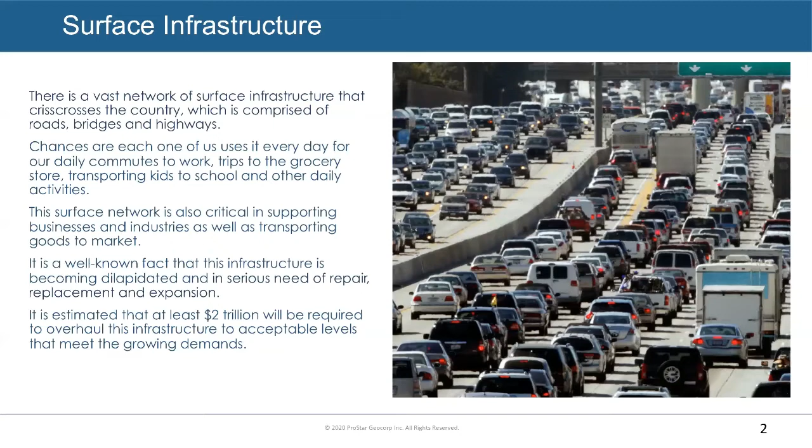It's a well-known fact that this infrastructure is becoming dilapidated. We hear it on the news, on TV, and of course we experience it - it's a nuisance when we hit a pothole or there are delays on the road because of repairs being done. It's estimated that it could cost as much as $2 trillion to get that infrastructure up to acceptable levels to meet the current growing demands.

To put things into perspective, there's 2.6 million miles of paved roads and highways that we rely on for daily commerce and commuting. Over 50 years ago is when most of this infrastructure was actually built. You heard Rob talk about ASCE, the American Society of Civil Engineers. ASCE recently gave a D+ rating to our infrastructure, which is obviously a pretty poor rating for those of us who got grades like that in school.

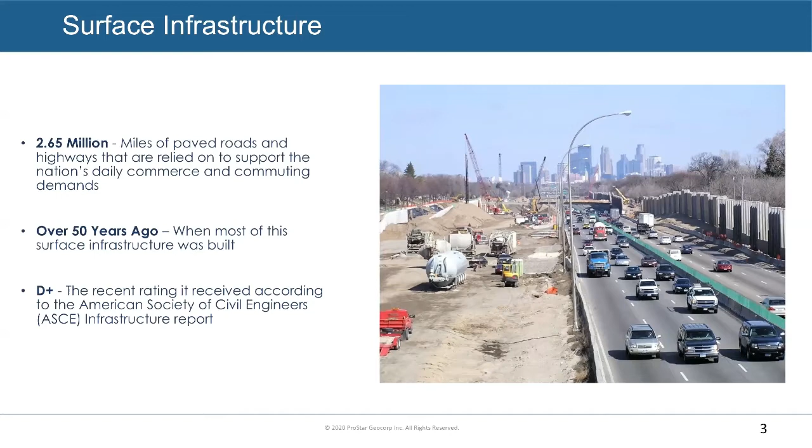Out of sight, out of mind. Again, a lot of times when we think about smart cities, we're focusing on what's above ground, but very seldom do we talk about what's below ground. Below the ground we have oil pipelines, gas pipelines, water lines, sewer, storm sewers, telephone, fiber optic, electric, cable. So there are a lot of utilities buried below the ground that maybe in some cases we're just not aware of because we don't get to see it every day.

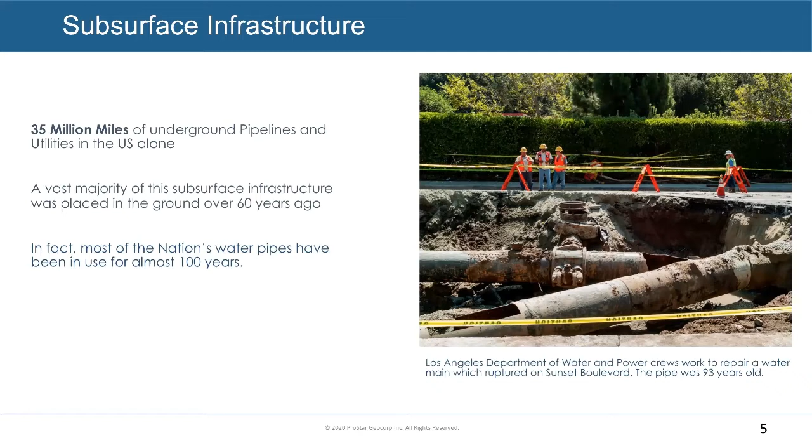As far as subsurface infrastructure, there's 35 million miles of underground pipelines and utilities in the United States alone. Most of that is buried below that 2.6 million miles of paved roads. One of the challenges is that the vast majority of that infrastructure was put into the ground over 60 years ago. In fact, most of the nation's water pipes have been in use for almost 100 years. Over on the right, I show you a picture of a water main that ruptured just off Sunset Boulevard in Los Angeles, and the pipe was 93 years old.

How many miles of oil and gas pipelines are there? In a lot of cases that's where most of the focus is, because if these lines have a problem or rupture, you're spilling gases into the ground. It affects our environment, and in some cases can cause explosions - it's very dangerous. But just take a look at some of these numbers: as far as gas distribution, there's over 2 million miles of lines buried in the United States. Gas transmission, 318,000 miles. Hazardous liquid, 200,000 miles.

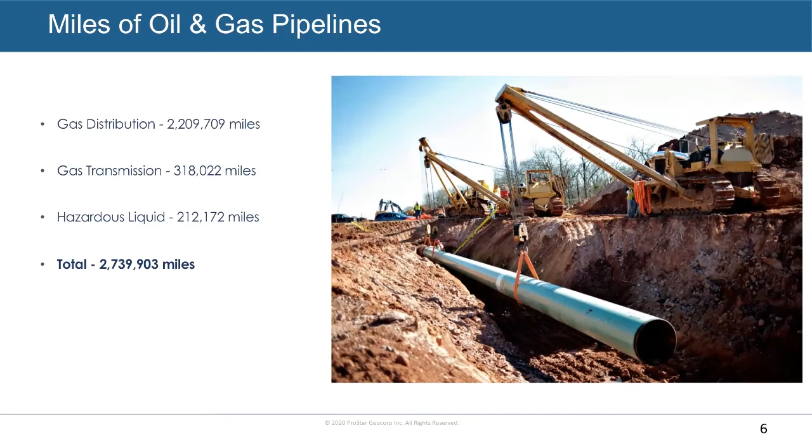So the total is a little over 2.7 million miles of pipelines that are buried below the ground. Now I just want to go over some annual additions just to show how fast this is growing and expanding.

There's 850,000 new houses being added each year. As a result, there's 50,000 miles of new gas pipelines being built, 250,000 miles of new telecom cables going into the ground, and 280,000 miles of new water lines.

What might surprise you, and I'll get into this a little later, is that as these lines are being put into the ground, in most cases they're not being mapped. So we really don't know where they're going into the ground, at least not with any level of precision.

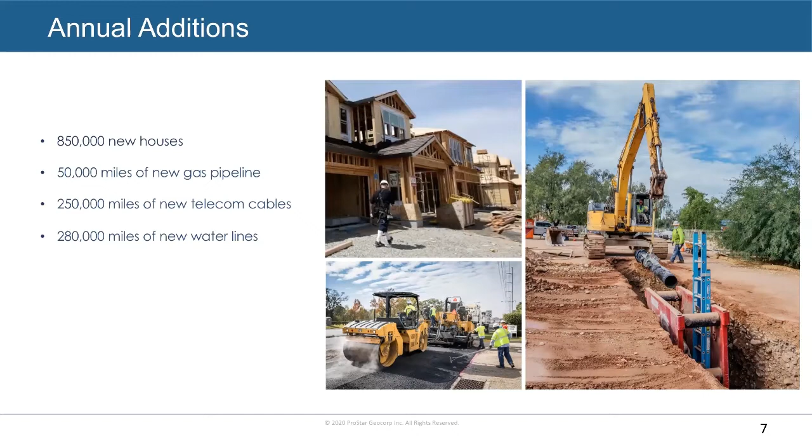So let's take a look at the problem this is causing. Obviously, anytime you add, repair, or replace the surface or subsurface infrastructure, you have a chance of damaging a utility line or a pipeline, and it happens far too often.

In fact, just in the United States, there's over 500,000 strikes per year, and that number is growing. That's about a strike every single minute of every working day.

And when a strike occurs, what happens? Lights can go out, traffic is disrupted. We've probably experienced maybe some flooding in and around our neighborhoods. But in worst case scenarios, gases get emitted into the air, and far too often they can be the cause of serious injury and sometimes even death.

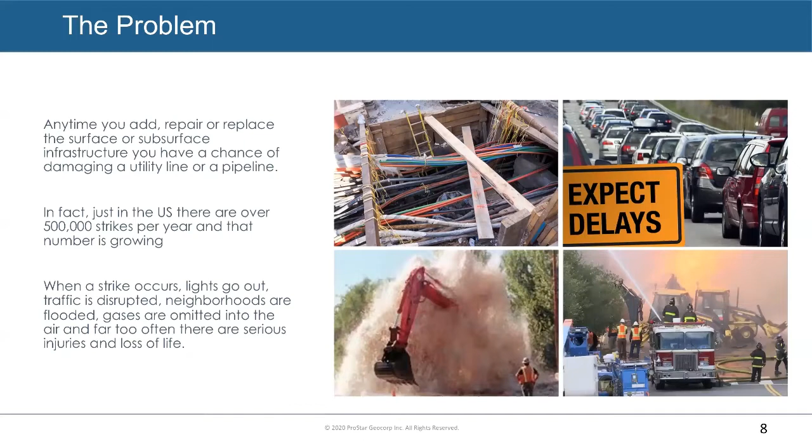Because I live in Colorado, I can give you an example, and we can focus on the Firestone incident. If you live in Colorado, you're very familiar with it. It was on April 17th of 2017 when a home exploded in Firestone, killing 2 men and leaving a woman and a child in the hospital.

Why did the explosion occur? It was due to ignition of a natural gas line that had been severed, so it had been cut. The problem was not knowing the location or the condition of that line.

But in that same year, we may not be aware of this, we had 9 more similar incidents. So it happens far too often, and it's often a result of not knowing where that utility line is buried in the ground or the condition of it.

So what's the current damage prevention procedures and processes that are in place? The speaker before, Rob Martindale, touched a little bit on 811. That process is implemented throughout the United States. Each state has an 811 center, called a one call center.

Utility and pipeline companies provide the location of their assets to the best of their knowledge to the 811 center. And 100% of construction projects, by law, have to go out and identify where the utility lines are prior to any type of digging activity occurring.

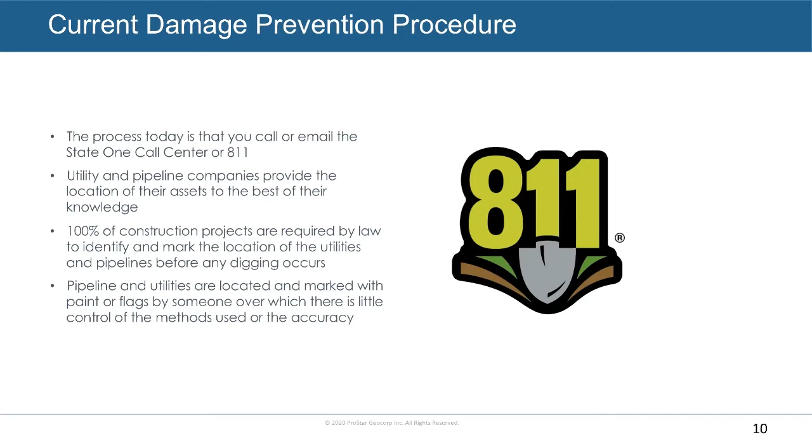These pipelines and utilities are located and marked by locate companies, and when they locate where that utility line is, they put down a paint mark or a flag. But the problem is that there's very little control methods in place or any levels of accuracy as far as how those utilities are located.

So let's take a look at one city, and I'll pick on New York City here and give you some statistics. Underneath about 6,000 miles of paved roads lies all their utilities and pipelines. Each year, to facilitate construction and repairs, they slice open those roads about 500 times per day. And anytime anybody slices open a road, there's a high probability that you're going to hit a utility line.

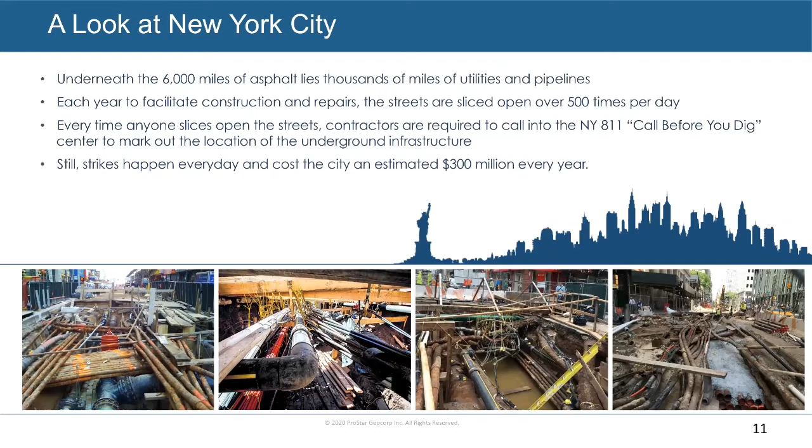So they're required to call the call center, 811, to have the locators come out and mark the location of where the underground utilities are located. However, still a strike happens every day and costs the city, they estimate, upward of $300 million every year.

So why does this occur? What's the problem? Well, the majority of the problem lies around the fact that utility and pipeline companies have very poor data of where their utilities are located.

Often these records are old, they're outdated, they've been lost, or maybe they never existed at all. Any records that do exist are often inconsistent in terms of their quality and their content, and because they're in different data formats, they're very difficult to share with others.

So let's take a look at what these records consist of. What I'm showing you here, similar to what Rob Martindale was showing CDOT, is an as-built drawing.

As-built are design drawings showing where the utility is planned to go. But more times than not, once they go out and install the utility, it's not exactly where they planned it to go. A lot of times that might be because they take a path of least resistance. It's not buried below the ground to the depths required because no one's really monitoring it. Or in some cases, maybe there's obstacles like buildings they didn't know were there, or the road's been expanded, the sidewalk's been moved, or the soil conditions are just too hard.

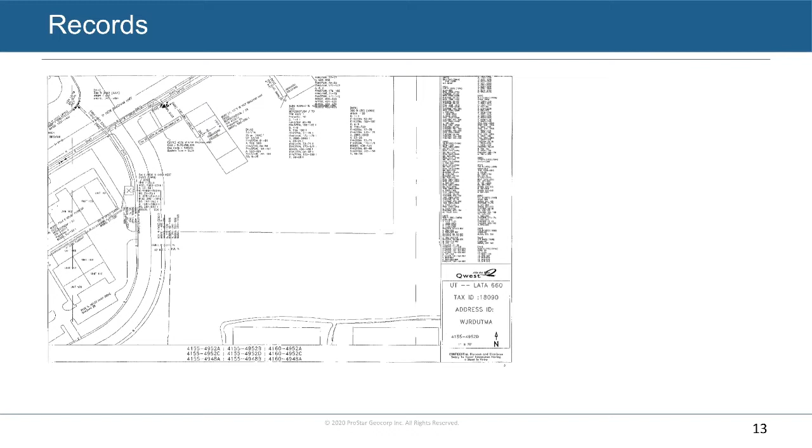Other times what they do is they'll provide sketches. So this is an actual sketch of a line coming out of a house, even though that's not exactly what it looks like. But these are the type of records that go into the system that the next person, either a contractor or an excavator, has to rely on before they make a dig decision.

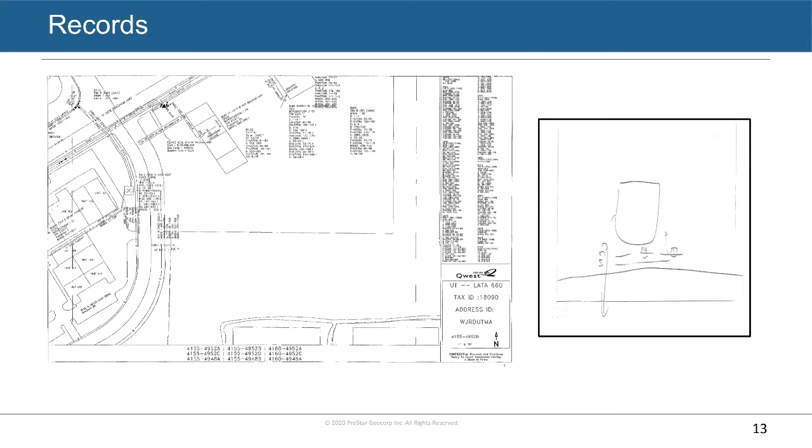How is the current utilities located? So when you call into the one call center, it determines which utilities could be impacted by the construction, then they send locators out to locate where the utility lines are. What you see on the left here is a radio detection electromagnetic locate tool. Once they locate where the utility is below the ground, they'll either mark it with paint, or in some cases they'll put flags down, especially if it's in a field or grass area.

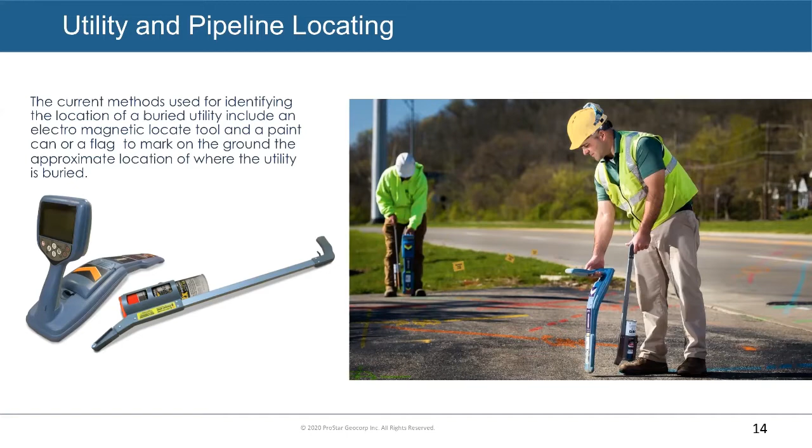The challenge is that they're not collecting the data. They're only putting paint marks down, or as mentioned, the flags. Here's an example you've probably seen many times. Maybe sometimes you wondered what it was when walking out on the street. You see all these markings. Each one of those marks, based on the color and the code, is marking where a utility line is located.

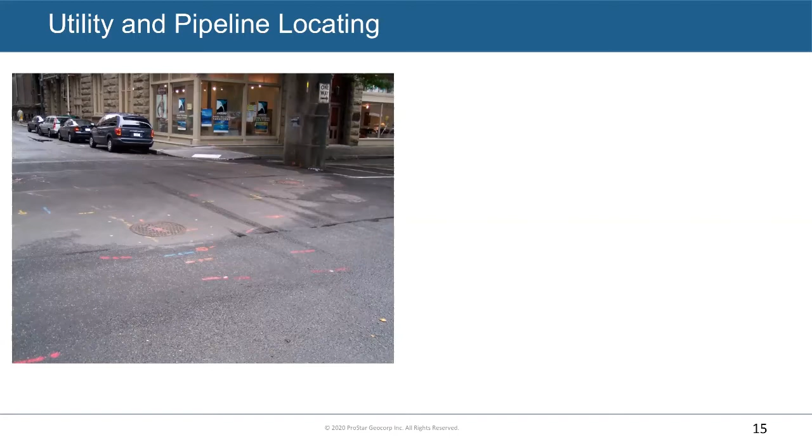When you go out and locate, it's known that that paint mark can be off by as much as 3 feet on either side of the marking. Well, the challenge is that in some of these corridors, especially in very condensed and populated areas, you could have a lot of utility lines within a 6-foot area. So this is an example of several utility lines compacted together. If the tolerance or variance can be 3 feet on either side of the marking, you can see how many utility lines you can fit within that 3 feet on either side.

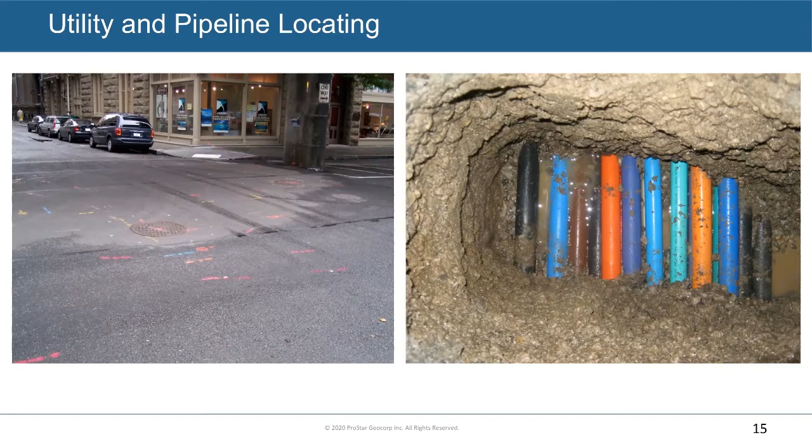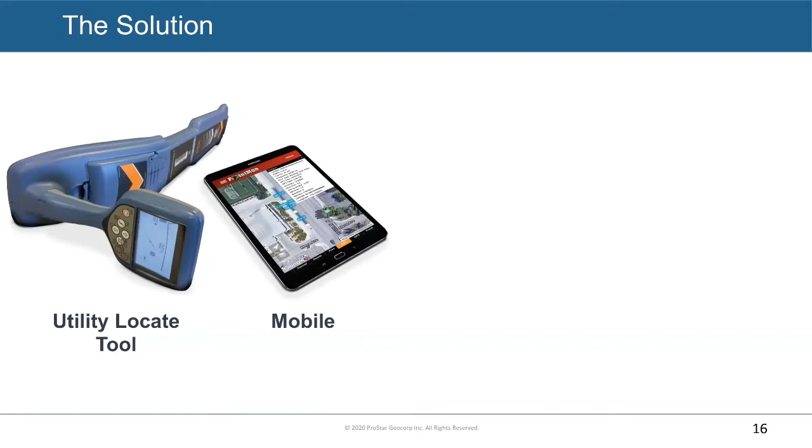So what's the solution? Well, this is something we designed years ago, and as Rob mentioned in his discussion previously, it's what we call Transparent Earth and PointMan. Basically what we did is we took the locate tool and integrated it with a mobile device using modern technology, including Bluetooth. Then when you integrate that with a precision GPS or GNSS receiver, it gives you the ability to capture, record, and visualize precisely where that utility is located.

So once it's located and captured onto the mobile device, the person out in the field collecting the data can see that he's collecting it, where he's collecting it. He can see the precision at which it's being collected. And then someone in the office can see in real time on their desktop how that data is being collected.

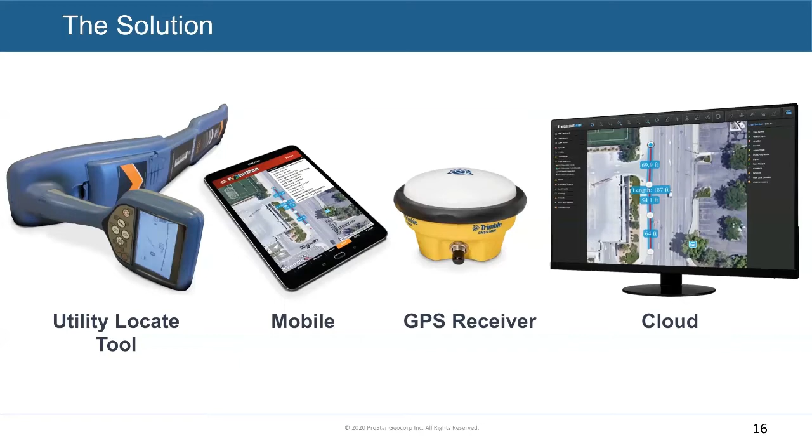So a little bit about PointMan. PointMan is just the mobile app we've developed that will run on any Android or iOS Apple device, and it's integrated seamlessly with the EM locate tool. You can use any GPS or GNSS receiver. The one I'm showing here is Trimble, but someone actually asked at the previous session with Rob: does PointMan work with other GPS, GNSS applications? And the answer is yes, it's designed to work with any major locate tool and also with any major precision receiver.

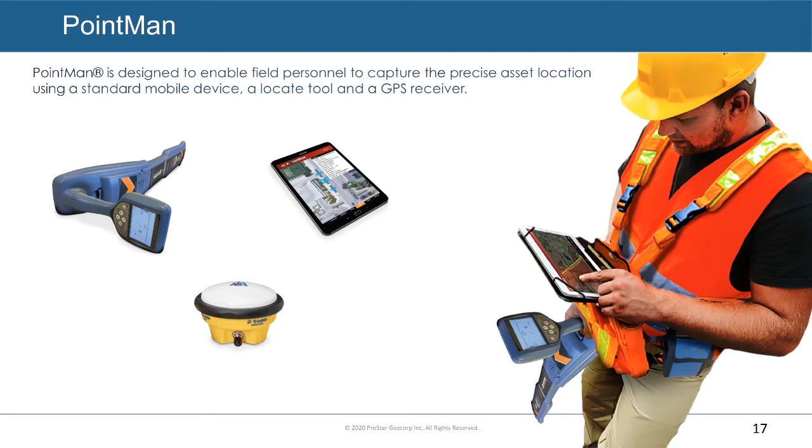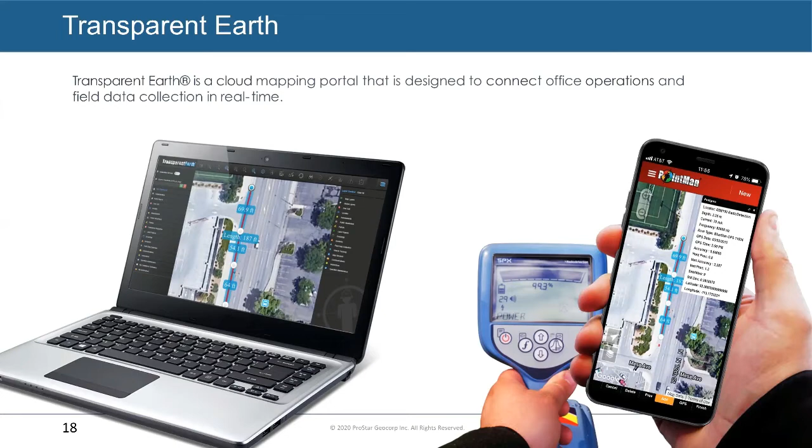Once the data is collected, in real time it's pushed up to the cloud and it's available on Transparent Earth, which is the desktop application. So it provides the ability that while you're collecting data out in the field, not only can you see it in real time on the mobile device, you can also see it in real time back in the office. So someone can actually be monitoring it and making sure that it's meeting specific quality specifications.

It also ties into 811. So what that means is that the one-call ticket can then be pushed out into the field onto the mobile device. And while the person is out there collecting the data, he can see the area of the one-call ticket, and where he's collecting and locating the utility lines.

He can also create forms so that instead of filling out forms on paper, which is how it's done the majority of the time today, we can create a digital form that's also geo-referenced. In the form, to ensure the quality of the locate, we can take photos to record where the lines were located. We can add notes using voice to text available on the mobile device, and use satellite imagery to provide a sketch of where the lines were located, so we don't have to draw a funny sketch on paper.

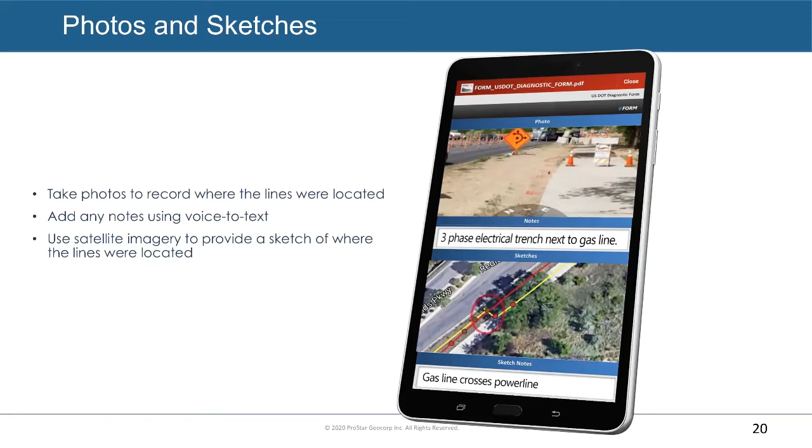So we can go ahead and add photos. And again, we can add sketches and then add any notes you want to accompany either the photo or the sketch.

So let's talk a little bit about what I think is next. With the current technology available today, we can precisely capture, record, and display where these utility lines are. Who needs that information the most are the guys out in the field - the engineering and surveying crews, the construction crews, and also the excavators. So how can we leverage modern technology, utilizing the data being collected out in the field, to not only map what's buried below the ground, but do it in a manner far more useful to prevent damages that far too often occur during construction?

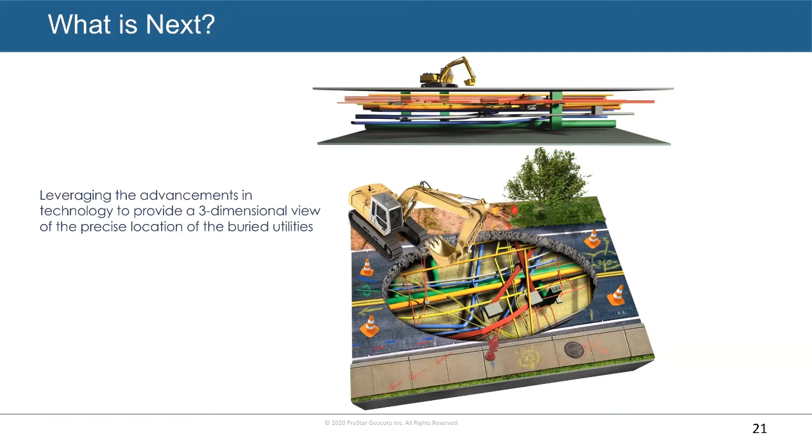Well, one of the advancements I see that we'll be able to utilize is the ability of 3D. We saw some of that in some previous sessions. So let's show you what I mean by that.

As I talked about, we can locate where the utility lines are and capture it on the mobile devices. We can integrate that with high precision GPS and GNSS receivers to ensure we're capturing that data, in some cases right down to the centimeter. We can make that information readily available up to the cloud so we can visualize it on desktop applications.

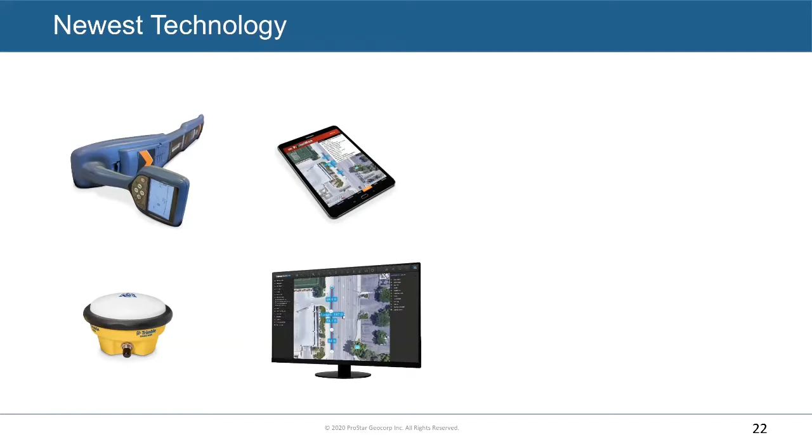But I think what's next is then we can utilize augmented reality. For example, this is the SiteVision device developed by Trimble. It's basically a handheld device for augmented reality that has a precision GPS receiver built into it.

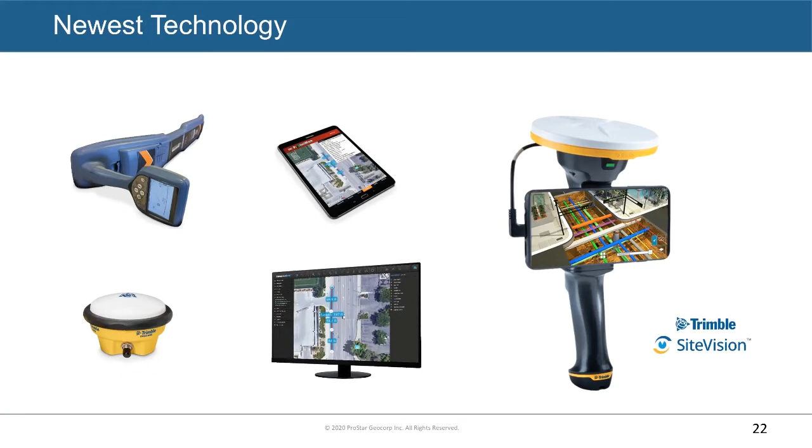So what would the applications be for that? Well, on the left, you can see if we collect all of the data utilizing mobile technologies, the EM locate tools, and high precision GPS receivers, we then have the data that can be viewed to relocate where these utilities are.

So if I'm out on the project, I could actually utilize augmented reality, in this case the SiteVision provided by Trimble, and walk around and see precisely where the utilities are located buried below the ground. Depending on where I'm doing construction and there's going to be groundbreaking activity, I can determine if the information I have is good enough to avoid any conflicts, or if I have to call another team out to precisely locate where those utility lines are to make sure I don't hit them.

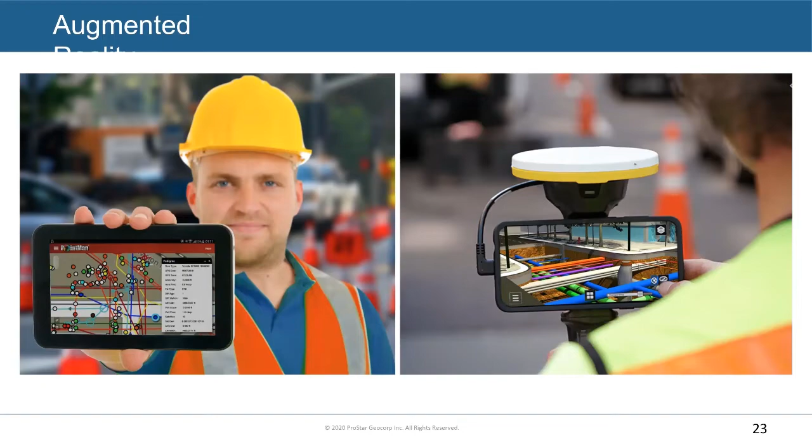So where do I see this going from there? Well, then I see this going to what I would call excavation guidance systems, where when the excavator is out there digging, we can also leverage this technology, including augmented reality, to provide a view of where all the utilities are relative not only to where the excavator is, but also where the bucket of the backhoe is. So he can see if there are any potential conflicts he needs to be concerned about. We could also provide warning signals if he's getting within a tolerance zone that's unacceptable with the bucket.

There's an old adage in the industry that unfortunately the number one utility locate tool is still the bucket and the teeth on that bucket, which is unfortunate because when something of that power hits a utility line, you can imagine the damage and potential consequences.

But this is where I see things going, and I think it's happening in a relatively short period of time, right around the corner, because all of the technologies are here to provide this. We just need early adopters to test it. Companies like Caterpillar and John Deere are working on these technologies, and you can already see what's available in augmented reality through companies like Trimble. We have the ability to precisely locate, capture, record, and display where utilities are buried below ground, so we have the wherewithal to provide this level of mapping and know precisely where utilities are located.

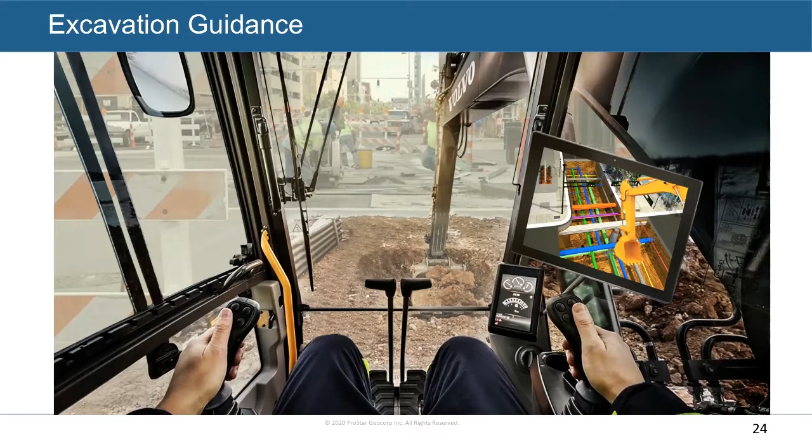Thanks, Rob—or thanks, Paige. Sorry about that. Thanks, Paige.

That was a great overview of what we're facing, especially the idea that even though there are statutes and rules now about how to collect with modern technology and modern capabilities moving forward.

We've got legacies, decades, centuries of unknowns out there in those right-of-ways. So anything that can be used when somebody does a locate, even if it's not that high precision, as long as it states a range of precision, at least it helps validate or verify some of those printed records that folks are recreating these networks with, for visualization and navigation tools.

I had a couple of follow-on questions from the last session. So you're tying in your locate tool—for instance, if somebody's using a GPR, which could come up with very precise data and also detect non-ferrous utilities if they're shallow enough, how hard is it to integrate that data with your applications?